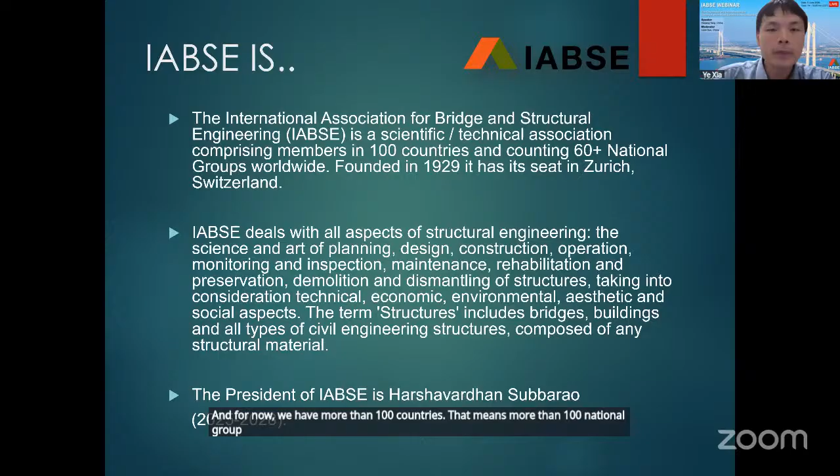There are a lot of events held by the IABSE association. For example, every year we have annual meetings. It takes 2 days, and it's associated with the Congress every year, usually in September. The upcoming event is the IABSE Congress Incheon 2026, held in Incheon, Korea. The next event will be in Guwahati, India in 2027, and also in the same year in Milan, Italy, also in September.

We have a lot of publications associated with IABSE. The first is Structural Engineering International, a journal that is SCI indexed. The second is IABSE Bulletins, where we have a lot of IABSE documents, case studies, and guidelines published. Also every year, when we have conferences, the proceedings will be published as well.

Since we have so many national groups, we also have independent activities from those national groups, such as sightseeing and some online and offline meetings in the national groups. Academically, we have technical commissions from 1 to 6, and also task groups in each commission. We also care about young engineers, so there are young engineer activities as well.

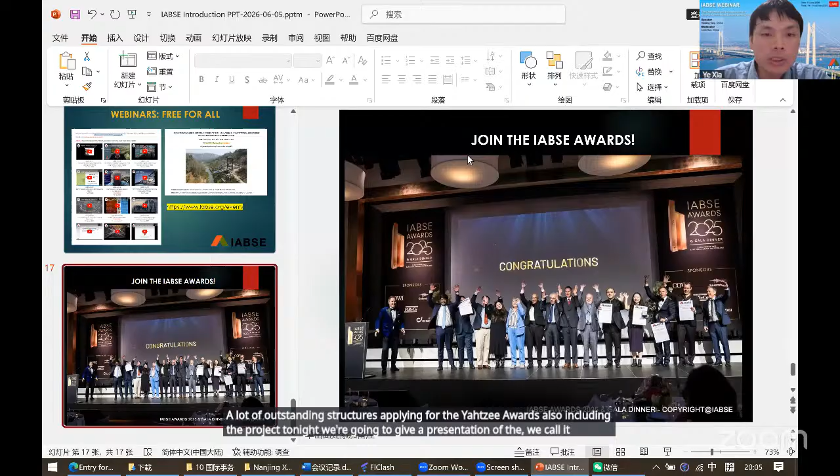Also, there is an Outstanding Structure Award. For example, every year we have a lot of outstanding structures applying for the IABSE awards, including the project we're presenting today, the Nanjing Xianxin Road Bridge project. So let's come to the seminar.

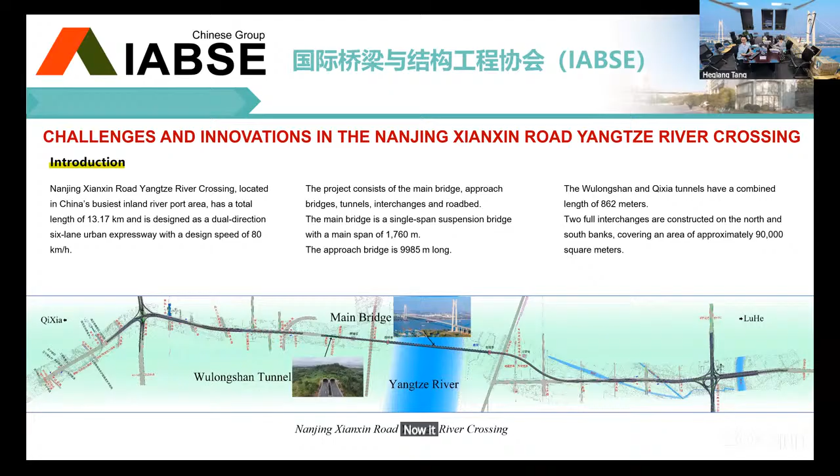Construction challenges: 1. Structural system challenge. The structural system of a super long span suspension bridge is confronted with the problem of complicated mechanical behavior and poor durability. 2. City landmark challenge. As a key urban landmark in the city center, the bridge demands high-quality architectural and landscape design.

3. Wind and fire resistance challenge. It has low flutter wind speed, significant vortex-induced vibration, and higher fire risks from hazardous chemicals. 4. Construction schedule challenge. The project is located in the urban central area, where on-site construction has a significant impact on traffic. Therefore, the construction period should be shortened. 5. Cost control challenge. There is a need to optimize the design of the anchor foundation and the main cable material for better investment efficiency.

6. Sustainability challenge. Strict demands for eco-friendly construction, heritage protection, and full life cycle carbon emission control must be met.

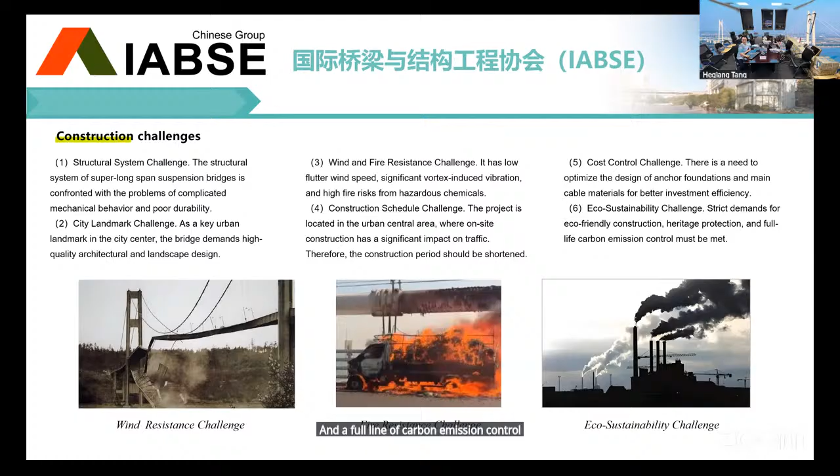Structural excellence. One, main bridge structure system.

The main bridge adopts a 1,760 meters single span suspension bridge scheme to cross the Yangtze River. This design avoids impact on navigation and flood discharge, while taking into account wharves, chemical zones, railways, and riverside ecology. To reduce costs, the main cable is only cantilevered over the main span. The side span of the main cable is 580 meters, with a side to main span ratio of 0.33 and a sag to span ratio of 1/9.

The stiffening girder has a width of 31.5 meters. The main cable transverse center distance is 27.7 meters, given a width to span ratio of 1/64. The girder depth is 4 meters, with a depth to span ratio of 1/440.

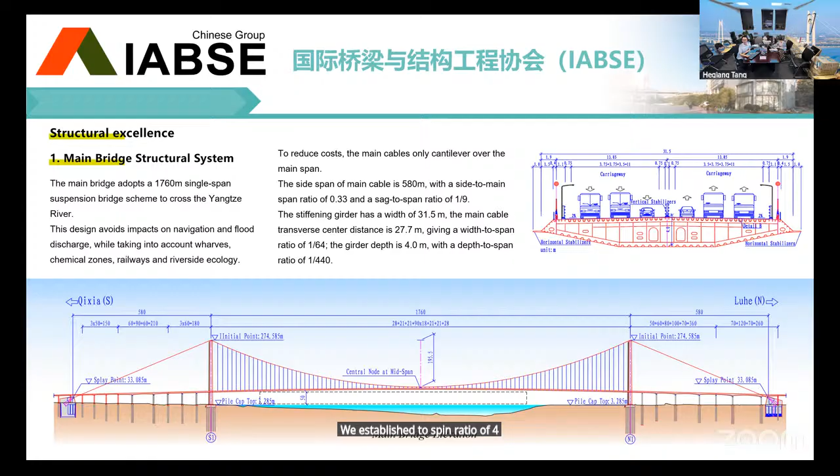Two, main bridge durability restraint system. The stiffening girder adopts a combined longitudinal durability restraint system, integrating viscous dampers, limiting devices, and central buckles.

The force velocity relationship of the viscous fluid damper follows the function F equals C times V to the power of alpha, where the velocity exponent alpha generally ranges from 0.1 to 0.3. Given an extremely low velocity, a smaller alpha value generates a larger damping force. It generates almost no additional reaction to thermal deformation and provides immediate damping force for earthquakes and wind vibrations.

With the assistance of this system, the daily cumulative displacement at girder ends is reduced from 80 meters to 9 meters, improving the durability of bearings, dampers, expansion devices, and short hangers.

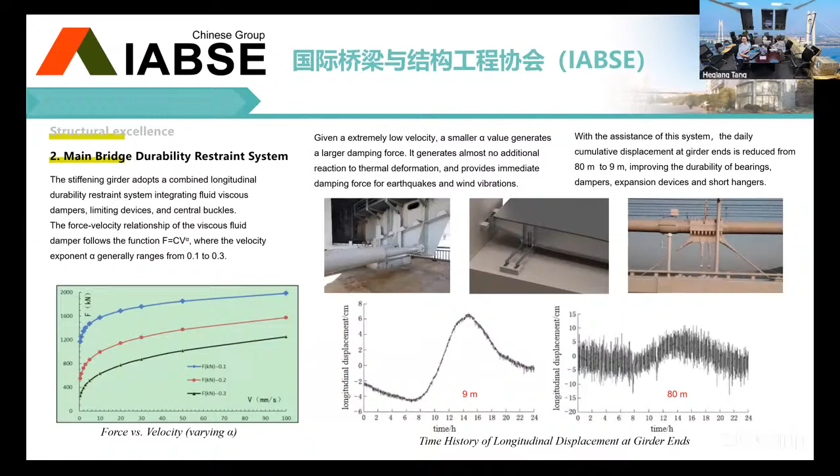Three, design of stiffening girder structure. The stiffening girder is made of a monolithic steel box girder. The top and bottom plates adopt U-shaped stiffening ribs.

The top plate is 18 millimeters thick, and its U-rib is 8 millimeters thick. The bottom plate is 10 millimeters thick, and its U-rib is 6 millimeters thick.

The longitudinal welds between the top plate and the U-rib use double-side submerged arc full penetration welds. This can enhance the fatigue performance of the orthotropic plates and reduce the risk of bridge deck cracking.

The standard section of the steel box girder is 18 meters long, and a transverse gusset plate is set every 3 meters.

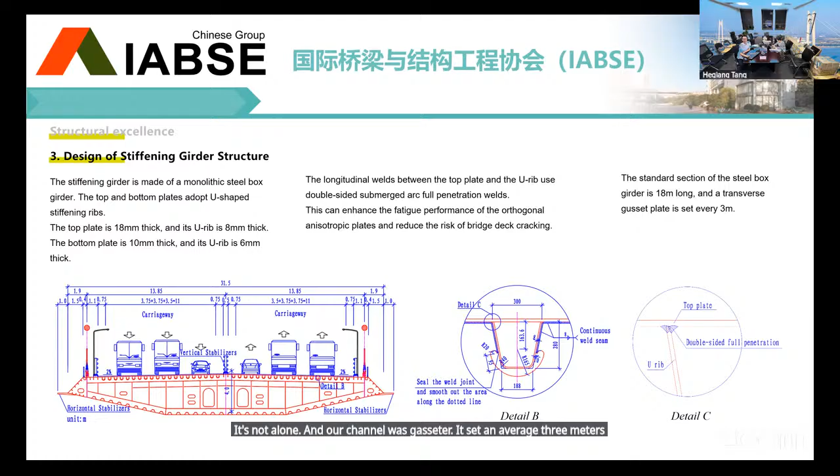For the design of the cable system, the main cables adopt the PPWS structure. Each main cable is composed of 169 strands, and each strand is made up of 127 high-strength steel wires with a diameter of 5.4 millimeters and a strength of 2,100 megapascals.

The main cable has a diameter of 879 millimeters.

The hangers are of parallel steel wire structure. The cable clamps are of cast structure, and a flexible central buckle is set at the middle span to enhance the durability and service life of the short hangers.

The main tower saddle is a structure combining casting and welding with a single longitudinal rib, while the splay saddle is a cast structure with a support at the bottom.

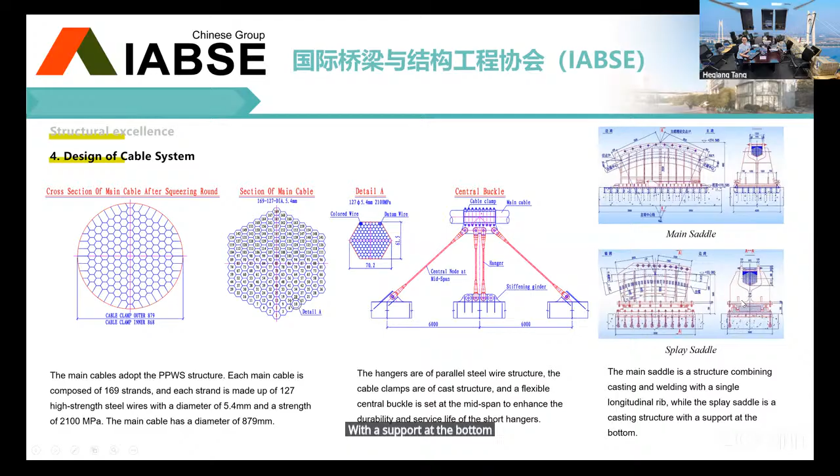Five, approach bridge complete structure. To cross the Yangtze River levee, chemical pipeline, and railway, the first span arrangement of the north approach bridge adopts an unconventional span layout of 50, 60, 80, 100, and 70 meters.

The main girder employs a corrugated steel web composite structure to resolve the difficulties in structural mechanical behavior.

The main girder of the approach bridge adopts precast steel-concrete composite structure to reduce the self-weight of the structure. Partial piers and bent caps adopt precast assembly, enabling standardized fabrication, accelerating construction, shortening the schedule, and minimizing traffic impact.

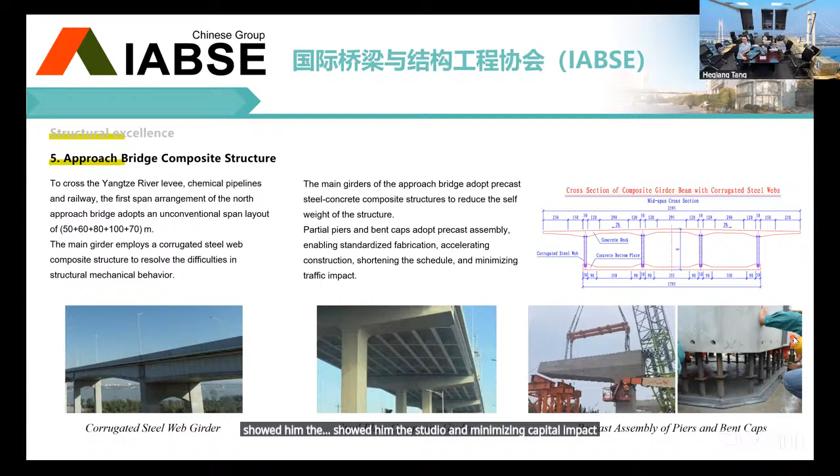Six, tunnel structure system. The Wulongshan Tunnel is 247 meters long. To protect the cultural relics of the Wulongshan battery site, a tunnel underpass scheme is adopted. The design method of constructing cut-and-cover tunnel by underground means is used, solving the stress challenge of a large-span biased double-arch structure under class 5 weak surrounding rock.

The Qixia Tunnel is 615 meters long, a shallow buried tunnel constructed using the simple and direct cut-and-cover method. This results in a five-layer transportation system.

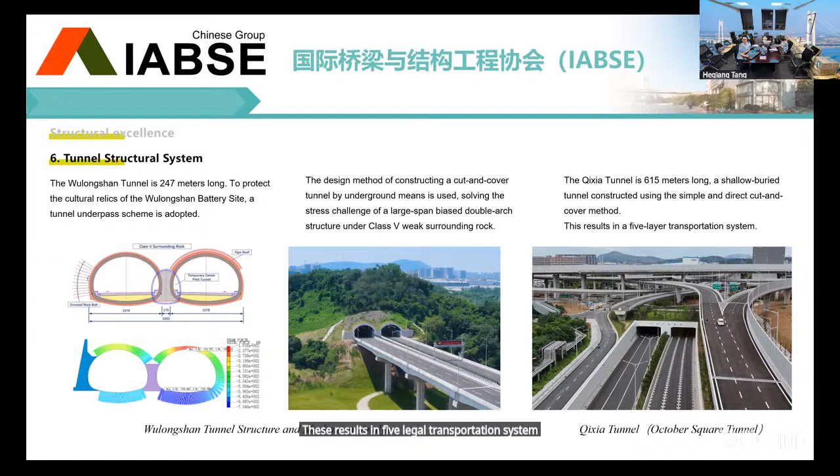Elegant design solutions. 1. The story of N. The N-shaped pylon design stood out from nearly 100 proposals, highly recognized by experts and deeply loved by local people. Its unique cultural heritage tells the story behind it. The letter N shares a profound connection with Nanjing.

Firstly, in history, the Yangtze River Channel originally featured an N-shaped planform. Secondly, Ning, a short form of Nanjing in Chinese, symbolizes the wish for the Yangtze River's tranquility and peace.

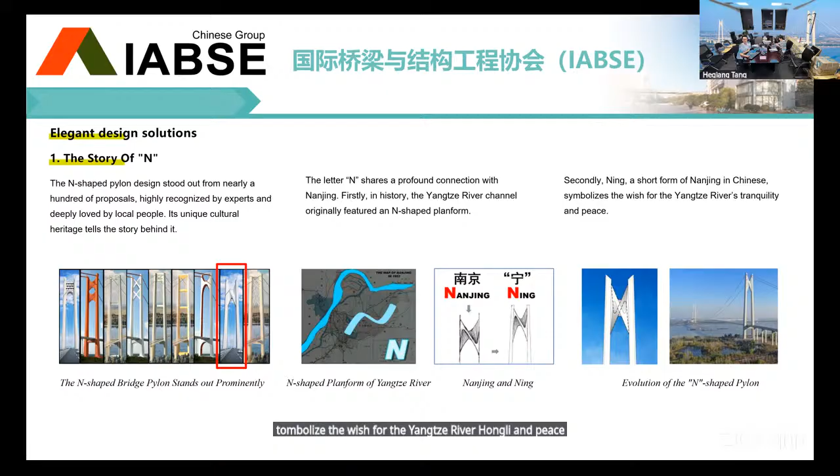2. The elegant design of bridge pylons, inspired by the morphological evolution of the Yangtze River course. The N-shaped intercolumn joint stands as an emblem of Nanjing's past and present, featuring a pair of anti-symmetric overlapping N-shaped motifs on both sides.

The pylon creates striking light and shadow effects by day, and showcases a four-season themed lighting display by night. As the four-season light and shadow rotate, the bridge is endowed with a dynamic soul and the radiance of an ever-bright city.

The 263.8 meter tall N-shaped main pylons and the 1,760 meter main span stiffening girder achieve a perfect harmony of rigidity and flexibility, seamlessly interweaving the millennium old cultural heritage of the ancient capital with the majestic power of modern bridge engineering.

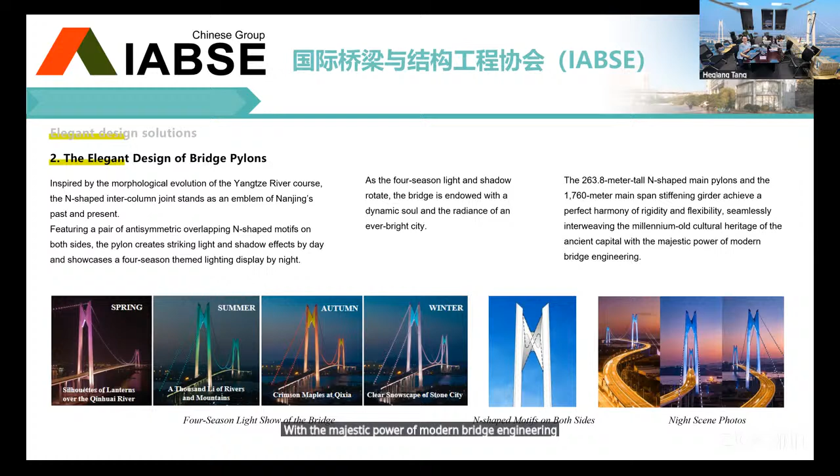The structural design of bridge pylons. The bridge pylons are of a gate-shaped frame concrete structure with two cross beams. The upper cross beam is a pre-stressed concrete beam covered with an N-shaped steel structure.

The inner concrete beam and the tower column together form an overall load-bearing structure, while the N-shaped steel structure on the outside achieved the architectural landscape effect. Overall, it achieved a harmonious unity of structure, load-bearing, and architectural landscape.

The bridge pylons are supported by pile foundations according to the design of the friction piles. 66 bored cast-in-place piles with a diameter of 2.8 meters are arranged at each bridge pylon.

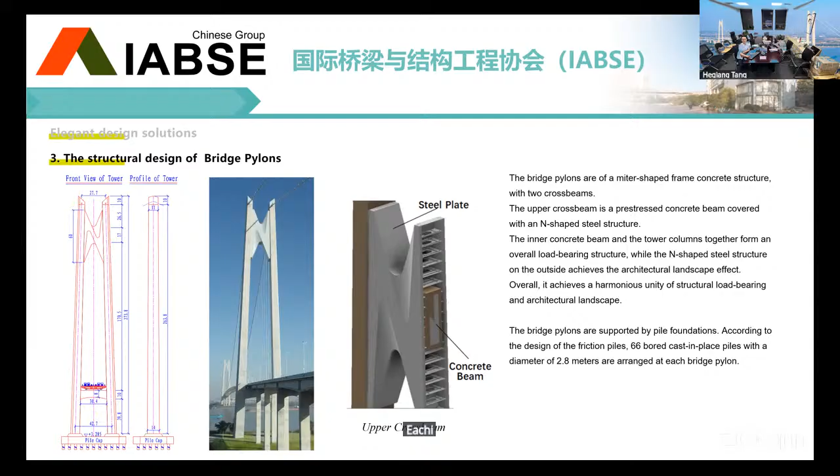Creative innovation. Structural wind resistance. Ultra-long span suspension bridges face significant flutter instability and wind resistant challenges, with long-term degradation potentially triggering vortex-induced vibration. Focusing on optimal wind resistant design at a 0 degree angle of attack.

The project team optimized the steel box girder cross section and over 30 wind resistance measures via wind tunnel tests, finally adopting 1 meter wide horizontal guide plates on both sides, plus a 0.67 meter high upper central stabilizer plate.

This configuration increased the critical flutter wind speed to 70.7 meters per second, exceeding the verification wind speed of 60.3 meters per second. Vortex induced vibrations were fully suppressed at a low damping ratio of 0.1%, and this design provides a damping reserve safety margin and greatly improves the structure's wind resilience.

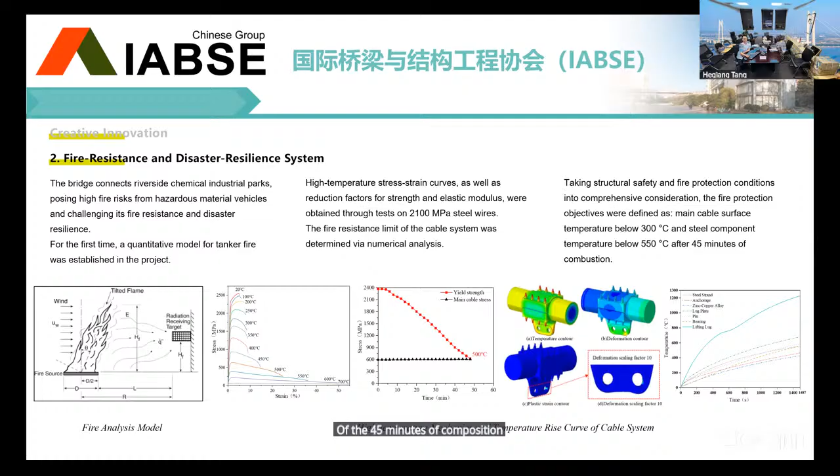A composite fire resistant tape consisting of main cable, aluminum foil, and high silica fiber was developed, and an integrated protection system of epoxy fire retardant coating plus anti-corrosion coating for steel components was proposed. With a protection height of 16 meters, it can withstand fire up to 1,200 degrees centigrade for 45 minutes.

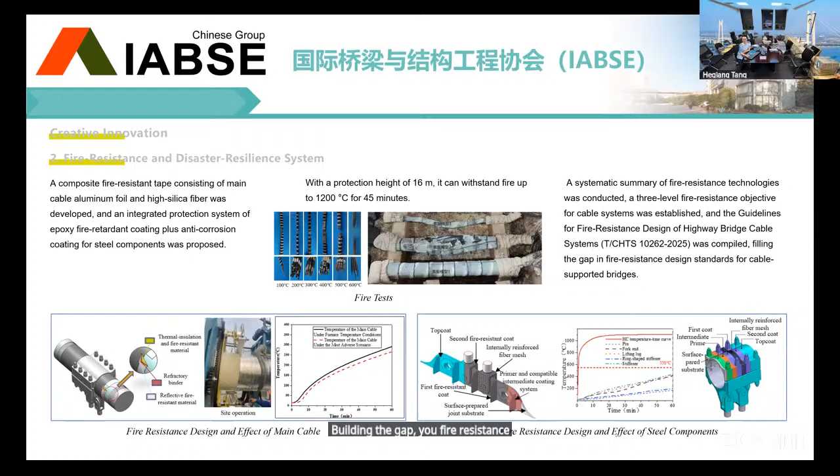A systematic summary of fire resistance technologies was conducted. A 3-level fire resistance objective for cable systems was established, and the guidelines for fire resistance design of highway bridge cable systems were compiled, filling the gap in fire resistance design standards for cable-supported bridges.

Anchor foundation design method. Ultra-long suspension bridge anchor foundations are extremely large scale. To improve cost efficiency, the team developed an anisotropic constitutive model accounting for soft soil creep and small strain stiffness effects, validated via triaxial and splitting tests.

The model clarified the soil plastic deformation and foundation-ground coordinated bearing mechanism, enabling the first anti-slip and anti-overturning design method for anchor foundations considering soil resistance. This method optimized the south anchor diaphragm wall and the north anchor open caisson, cutting overall foundation volume by 12% to 15%.

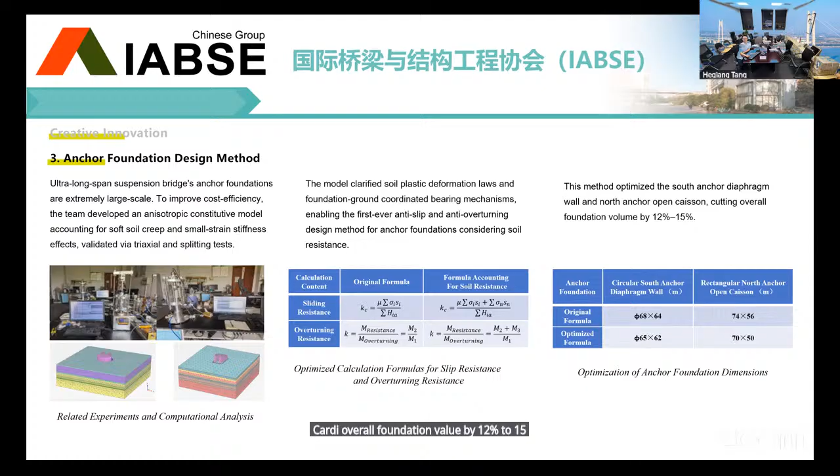Anchor design. The main cable anchorage system is made of steel structure and is coated with isolation and anti-corrosion layers around it. Circular south anchor diaphragm wall, diameter 65 meters, height 62 meters. Rectangular north anchor open caisson, length 70 meters, width 50 meters, height 50 meters.

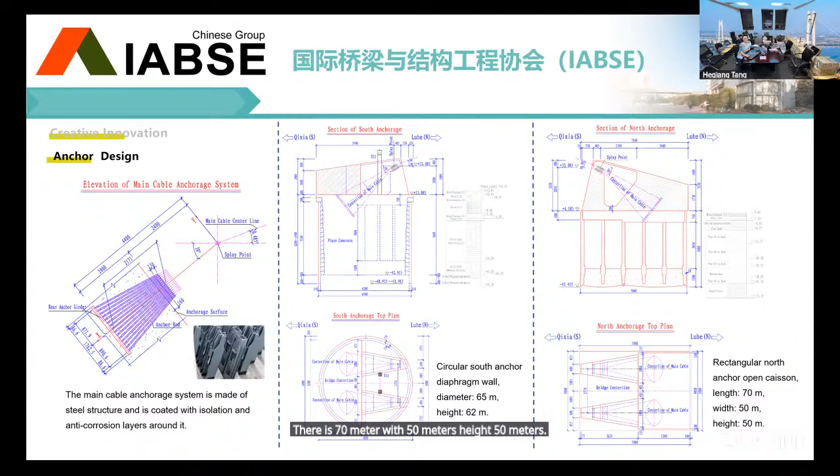Research and application of new 2,100 megapascal steel wire material. Ultra high strength steel wire pushes the main cable load bearing capacity and span potential and improves its toughness. Technologies including ultra purification, harmless smelting, and online water patenting were adopted. Refine the microstructure to over 90% sorbite content, 100 to 150 nanometer lamellar spacing, and grain size above grade 6.

Optimize the lubrication during wire drawing, suppressed residual stress and surface cracks, enabling the development of 2,100 megapascal main cable steel wire that meets all technical requirements. The test was conducted for more than 20 times of torsion, 8 times of winding, 4 times of repeated bending, and 2 million times of fatigue. Each application cut steel consumption by 7,153 tons and saved 110.7 million Chinese yuan.

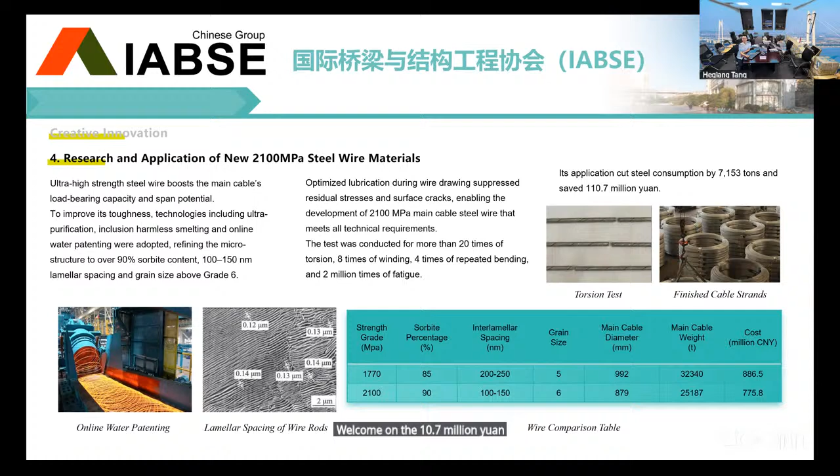Sustainability, carbon emission assessment. To implement the dual carbon strategy, the scheme proposed a carbon emission verification method for large suspension bridges. It established the carbon emission evaluation indicator system, and developed a carbon emission indicator database and accounting system.

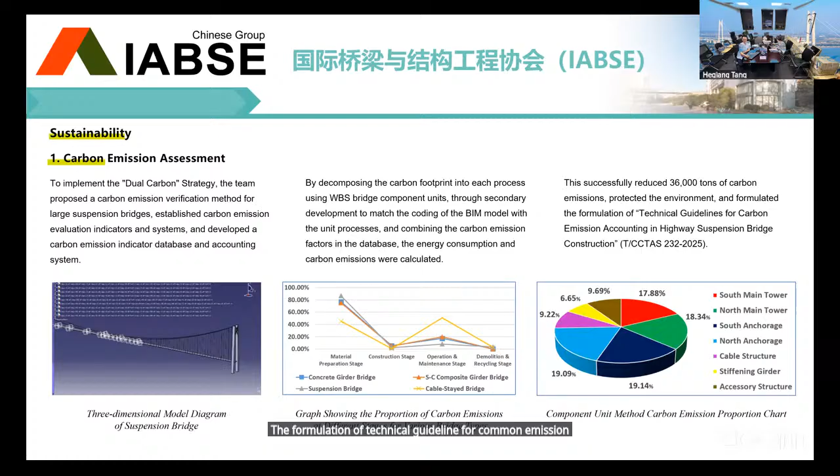By decomposing the carbon footprint into each process using WBS bridge component units, through secondary development to match the coding of the BIM model with the unit process, and combining the carbon emission factors in the database, energy consumption and carbon emission were calculated. This successfully reduced 36,000 tons of carbon emission, protected the environment, and led to the formulation of technical guidelines for carbon emission accounting in highway suspension bridge construction.

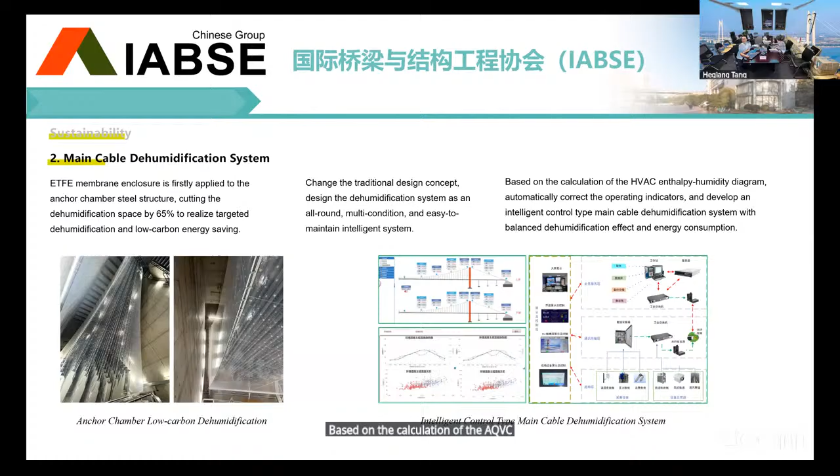Main cable dehumidification system. ETFE membranes are first applied to the anchor chamber steel structure, cutting the dehumidification space by 65% to realize targeted dehumidification and an easy to maintain intelligent system. Based on the calculation of the HVAC enthalpy-humidity diagram, it automatically corrects the operating indicators, and an intelligent control type main cable dehumidification system was developed with balanced dehumidification effect and energy consumption.

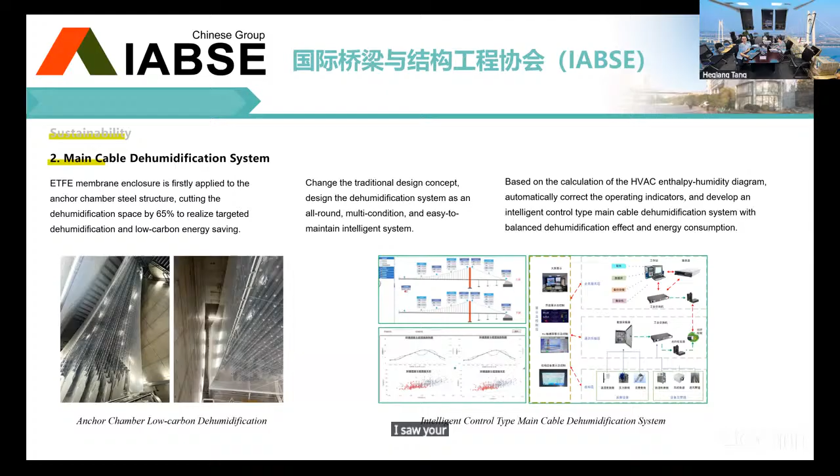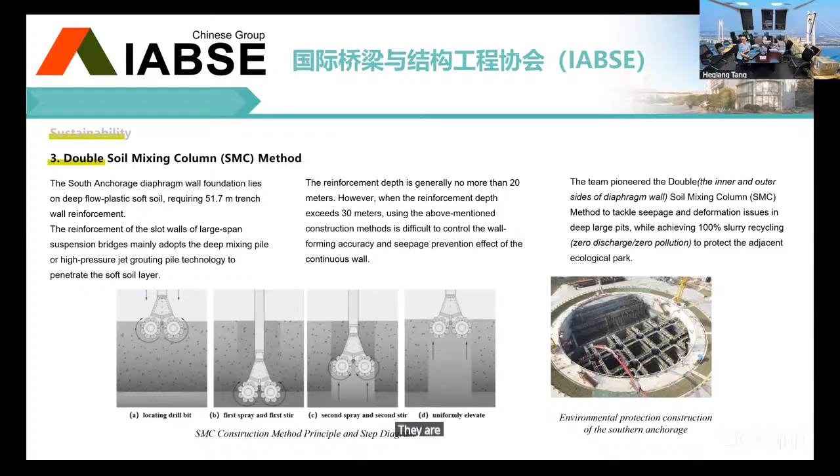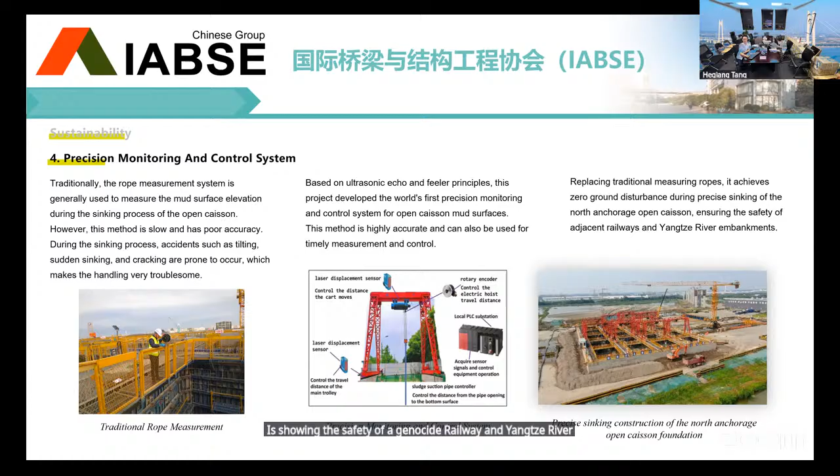Conclusion: Nanjing Xianxin Road Yangtze River crossing has achieved remarkable results in construction excellence, elegant solution, creative innovation, and sustainability. It has formulated 3 standards and specifications, saved 350 million Chinese yuan in investment and promoted technology progress. It has become a new landmark and a popular spot for photo taking. The technology developed in this project has been replicated in multiple projects in other fields, such as highways, railways, and municipal works.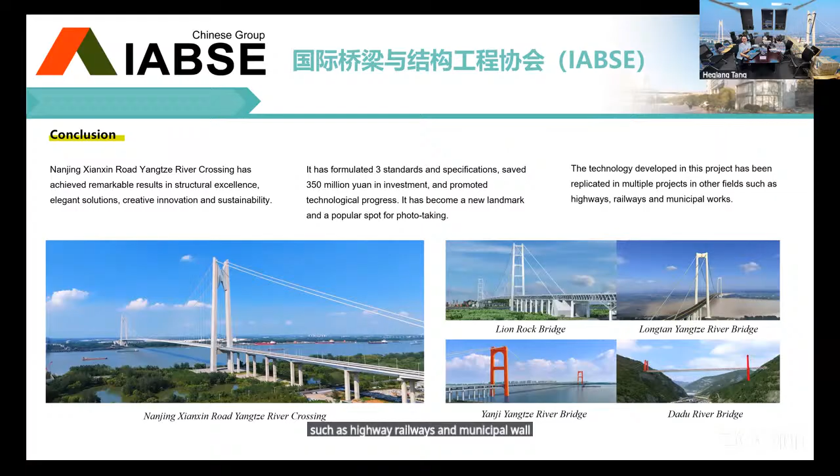All right, thank you very much, Mr. Tang, for the presentation. Well, generally speaking, this crossing project is fantastic. The suspension bridge spans 1,760 meters, and now it's the third longest suspension bridge in the world. So we can see there must be a lot of challenges, a lot of problems when we design, construct and maintain this bridge.

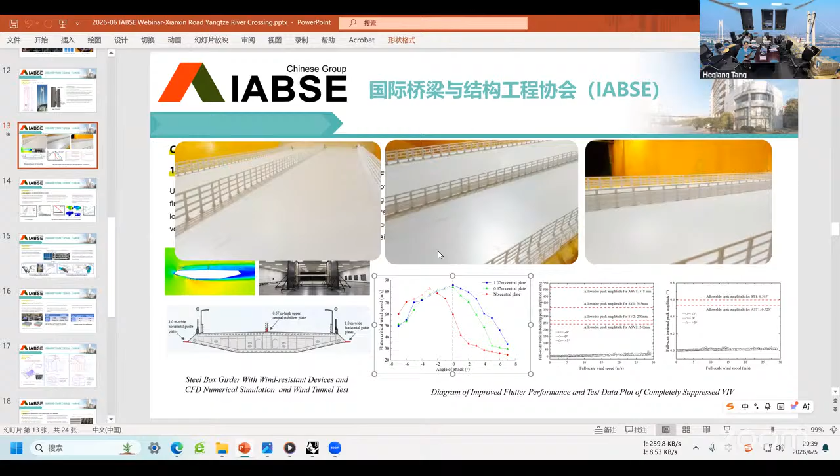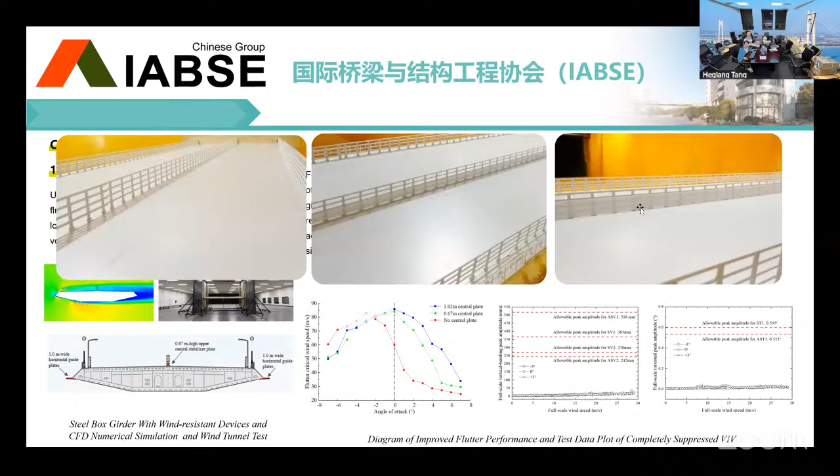Okay, I'm the assistant of Mr. Tang. Let me share this question, and I will go to the back page. Here we have two kinds of plates. Number one, we have the horizontal guide plates here. There are two plates on each side of the girder, with a width of 1 meter. And there is a single upper center stabilizer plate with a height of 0.67 meter here.

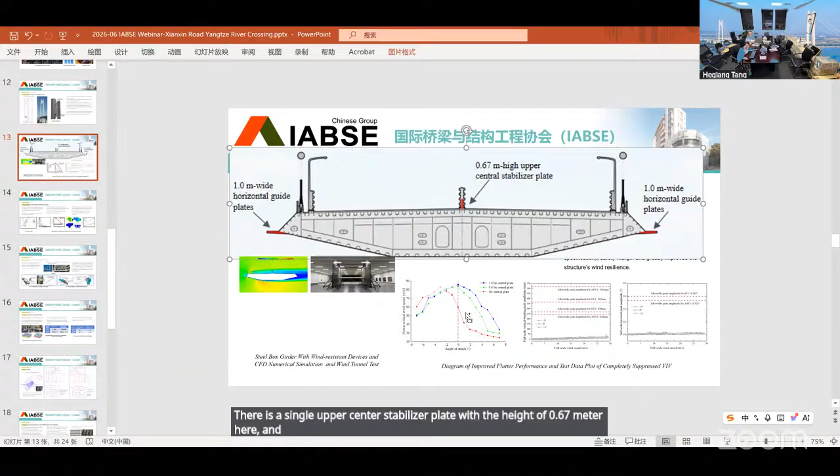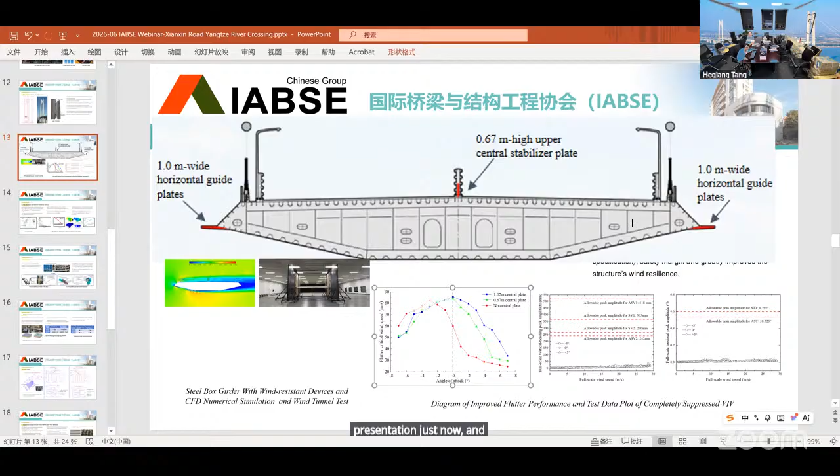And we can see the curve, with about 30 measures tested according to the presentation just now. And here we have a graph. If we don't have any center plate, the flutter critical wind speed is about 60 meters per second. If we have a 0.67 meter center plate or a 1.02 center plate, the speed will increase a lot, to nearly 90, about 85 meters per second.

So this is one kind of upper center plate, but finally we chose the 0.67 meter center plate as the ultimate design. Okay. Yeah, all right. Thank you. I think it's very clearly answered.

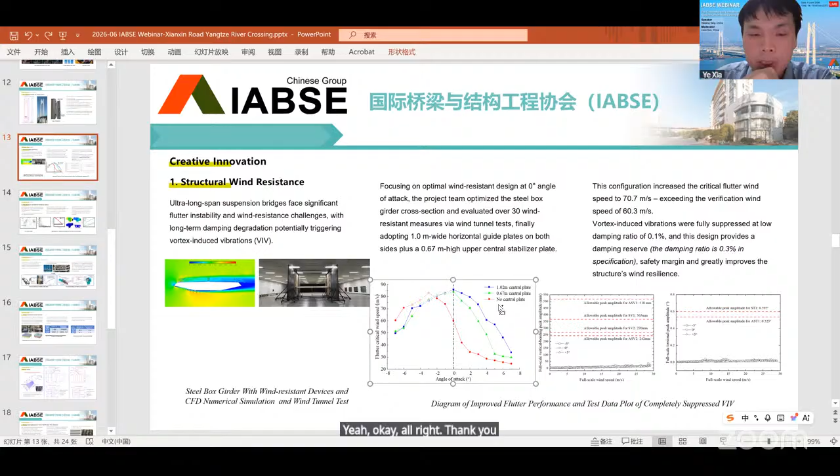And following the previous question, there's one more question with similar concerns about wind resistant performance. This is also answered as well. Yes, usually for these long span bridges, they always do CFD numerical simulations and also the full scale wind tunnel test. This is done for every long bridge in China. Okay, let's come to the next question.

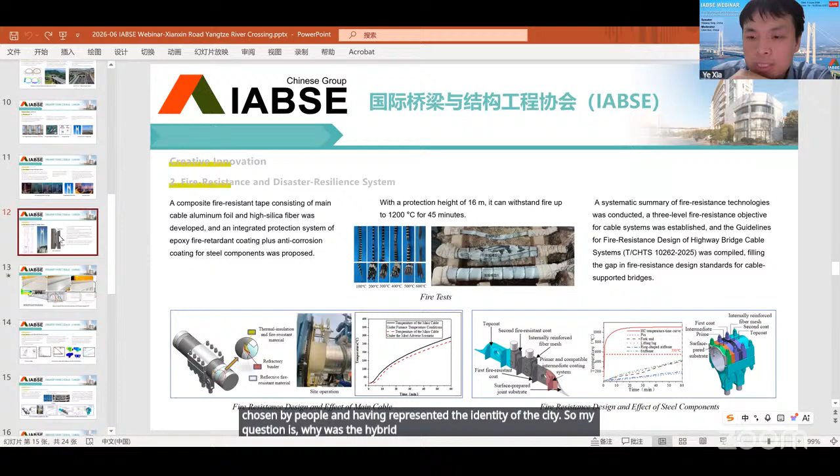Gaurav asks, the motivation behind the N shape is quite inspiring, having been chosen by people and representing the identity of the city. So my question is, why was the hybrid approach of using inner concrete and outer N-shaped steel structure chosen for the upper crossbeams of the pylons? Maybe I can answer first. They ask why N? I think the N shape is the initial of Nanjing city, so it's N.

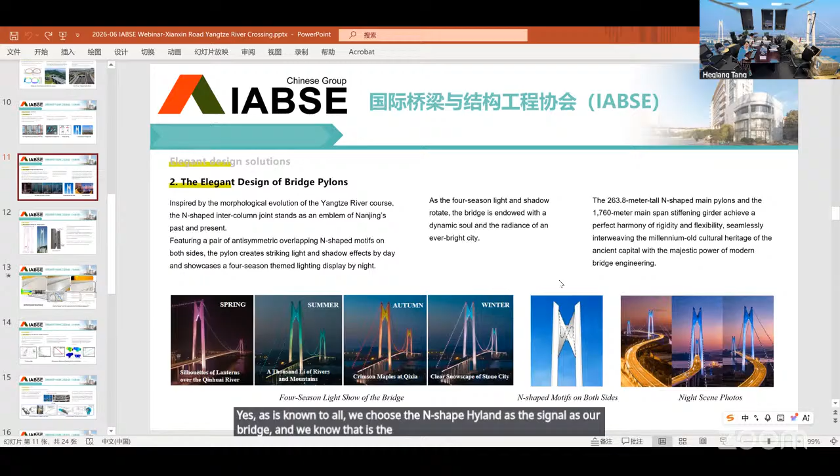Yes. And why inner concrete and outer N-shaped steel structure? Maybe you can add more information. Yes, as is known to all, we chose the N-shaped pylon as the signature of our bridge, and it relates to the history of Nanjing. But the N shape is a 3D surface solid. It is a very complicated shape. It is not very suitable for bearing these two large horizontal forces here.

So we use a concrete beam, and this concrete beam is strengthened by pre-stressing here to make the two columns more rigid. Yes.

Okay, there is one more question regarding the N-shaped pylon. George asked, was it not possible to incorporate the N-shaped link into the load carrying system, given that the optimization of materials was a major goal of this project? Well, are you going to answer it, or do you want me to?

We did consider this idea, and we tried it in several models. But it is not suitable for the steel component. It is not suitable for a steel component to be fixed to a concrete column properly, because when we use some connection, for example a welded or bolted connection, it will create intensive stress. Yeah, that's the answer.

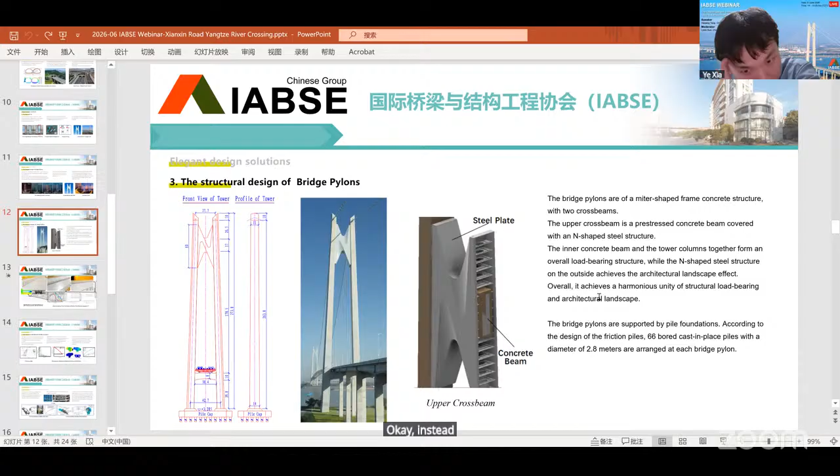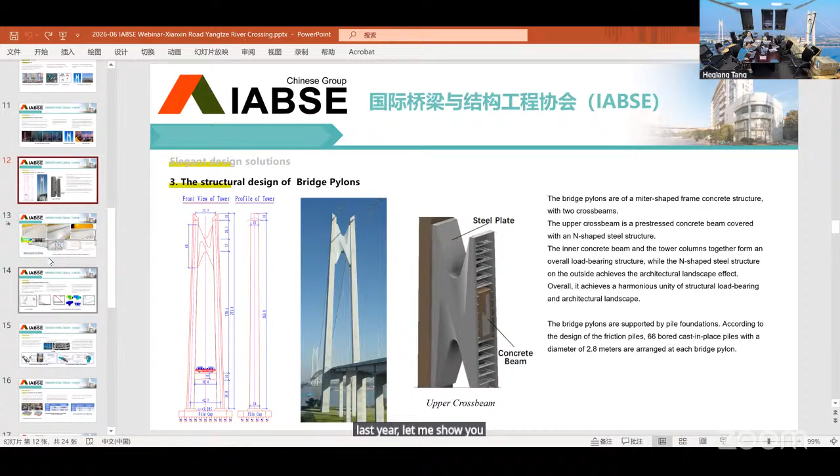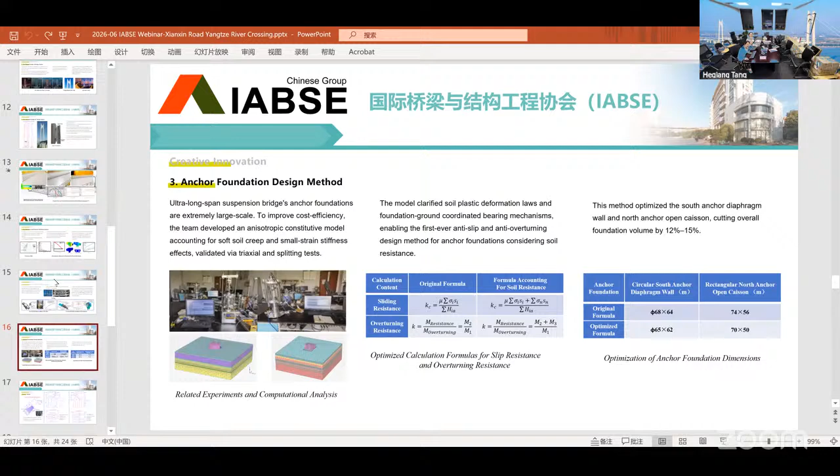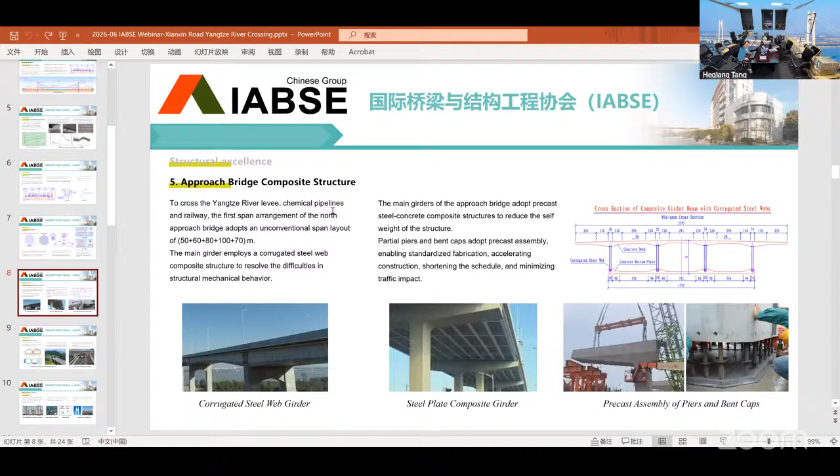All 3 together make the main bridge, with the long span of 1,760 meters, move smoothly and safely during the earthquake. Okay, that's all.

All right, thank you. Besides wind and earthquake, I think one point of this research is to consider fire. So this is one of the innovations of this project. Yes, we did much research work about fire resistance and the disaster. Here we did much research work.

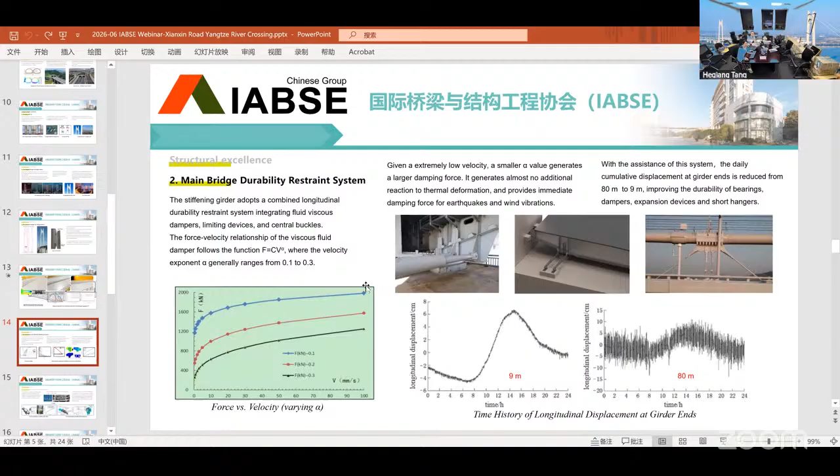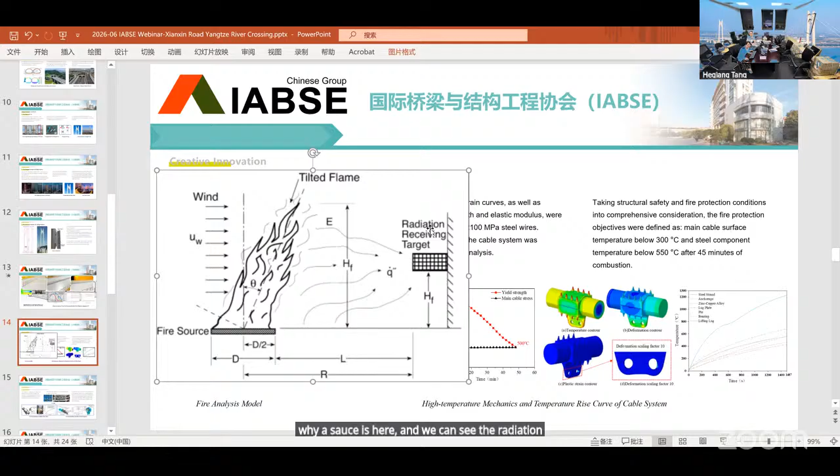Here, this picture shows us the tilted flame, that is the flame of the fire. The fire source is here, and we can see the radiation receiving target here. Another one is the stress-strain curve of the steel. You can see here, at different temperatures, the stress and strain curves are different, from 100 degrees centigrade to 700.

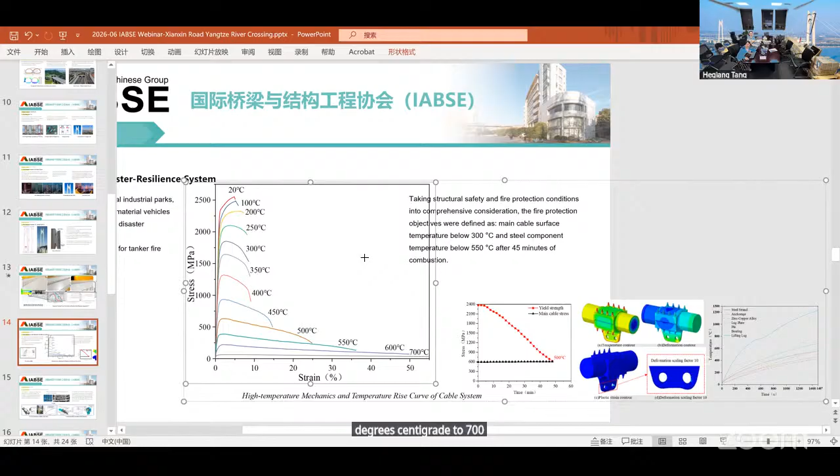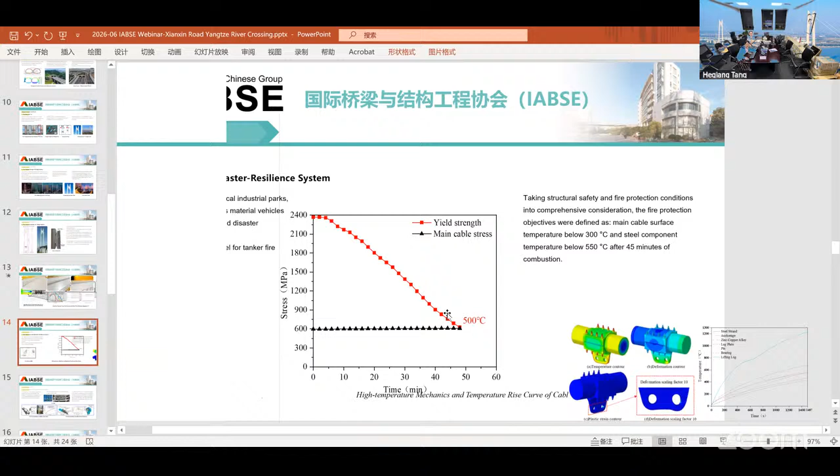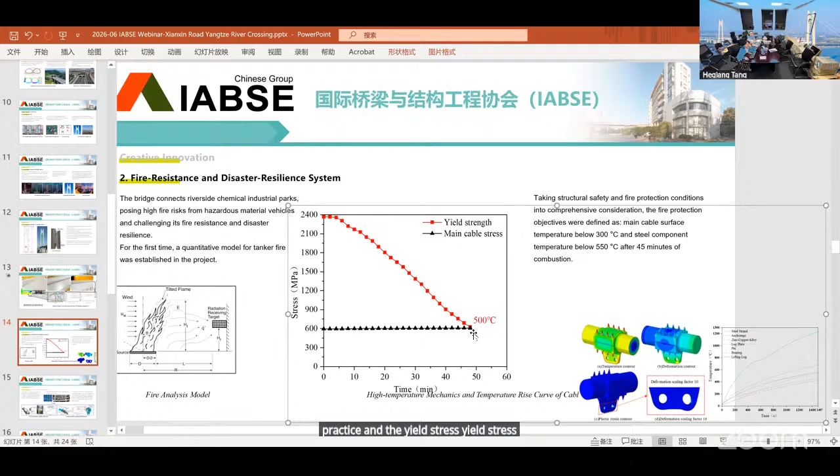And this one is the yield stress. According to the time passed, the main cable stress is almost like this, and the yield stress decreases sharply. We also do some calculating and simulating work on the computer.

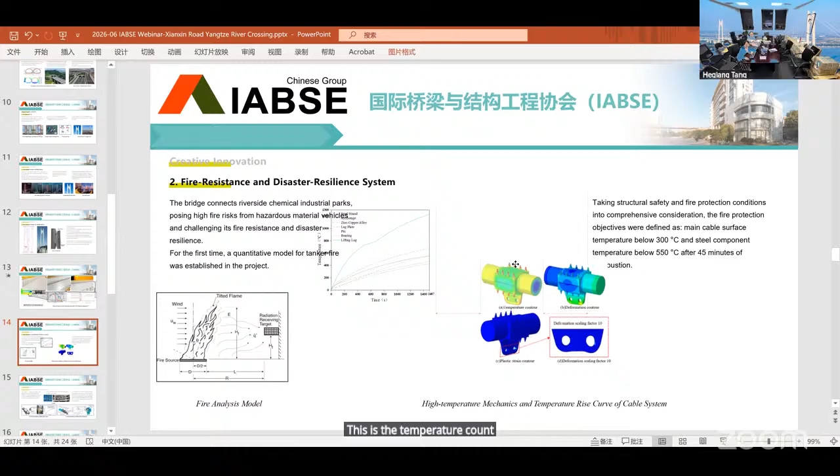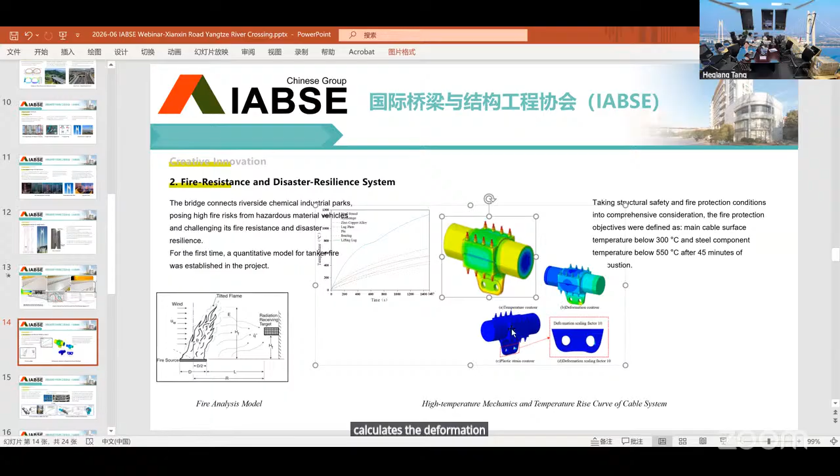For example, this is the temperature contour. We input the temperature field, the temperature condition, into the solid model in ANSYS, and we can calculate the deformation contour here, and we can also calculate the plastic strain, plastic stress, and the deformation of the stiffener plate.

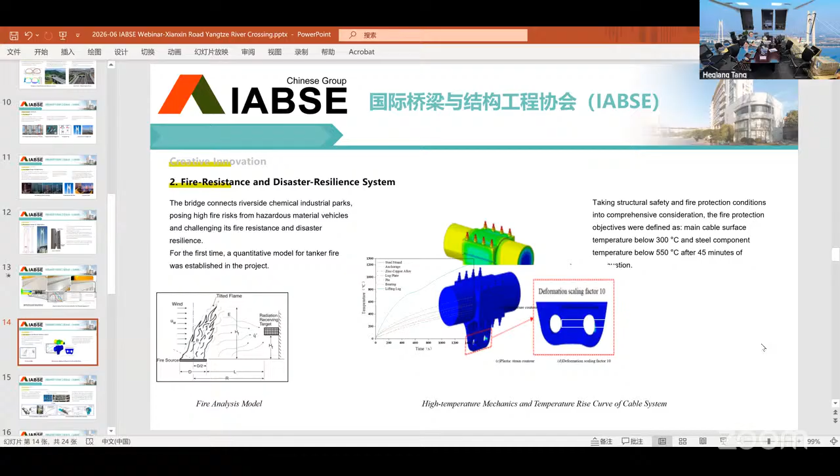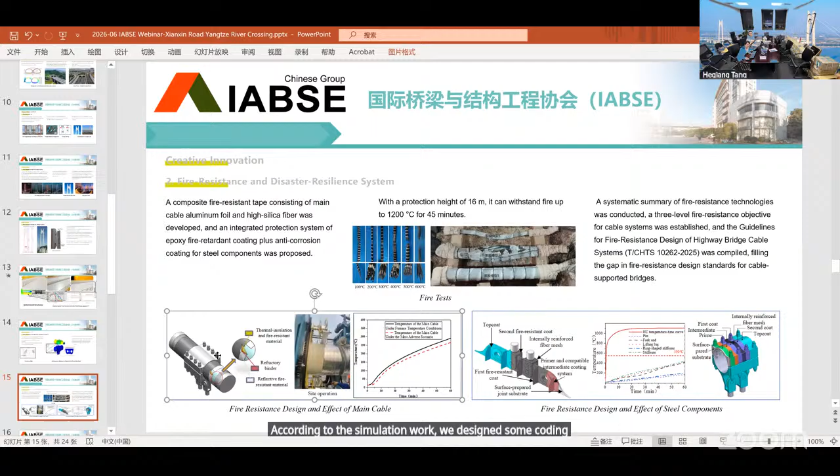According to the simulation work, we designed some coating here. For example, for the main cable, we give this coating system. This is reflective, fire resistant material. The second is refractory binder, this is the middle layer. And the third is thermal insulation and fire resistant material.

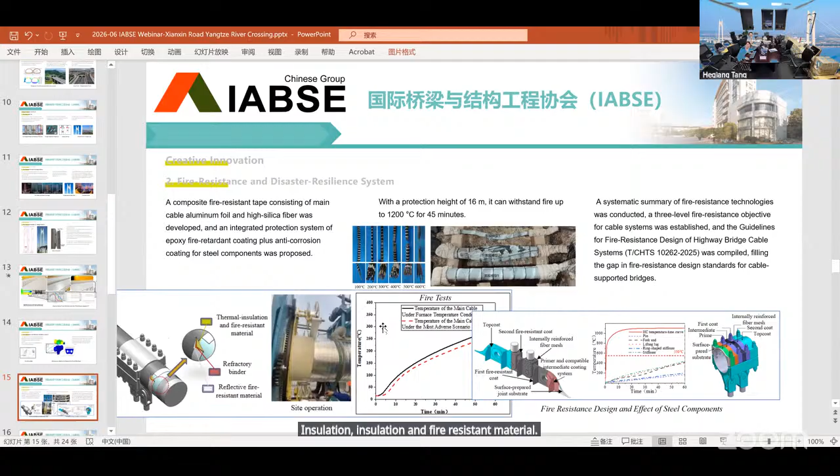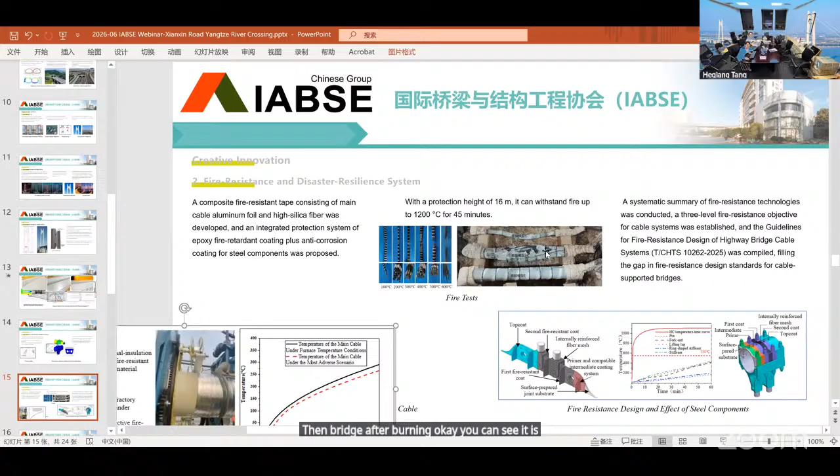And we do many tests here. This is the burnt bridge after burning. You can see it is seriously destroyed by fire. And this is the coating for the joint of the cable. This is the coating for the suspenders and the main cable.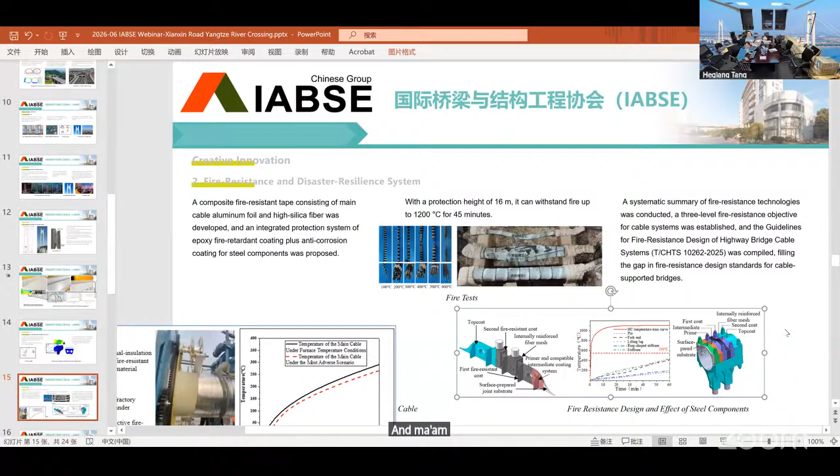After all the protection system, our steel components have very good behavior under high temperature or fire disaster. We can see the dashed lines with different colors are much lower than the allowance of 550 degrees centigrade. Okay, so.

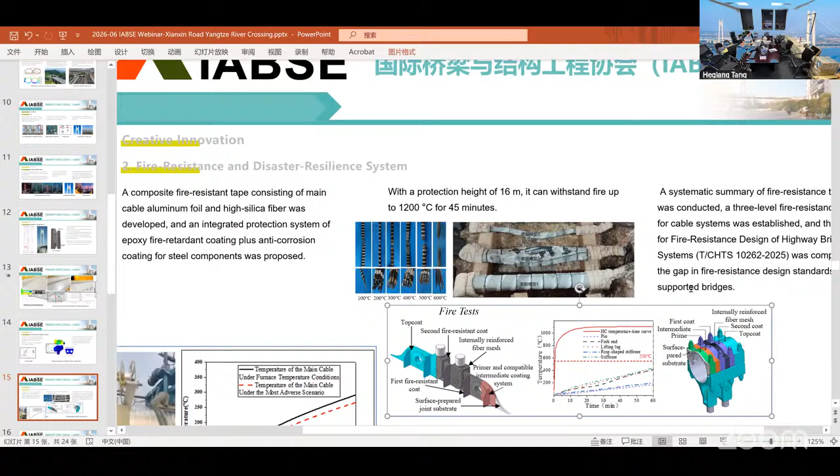All right. Thank you very much, Ms. Chen. I think we have already answered mainly all the questions raised by the audience. I personally am very proud of such a huge infrastructure project.